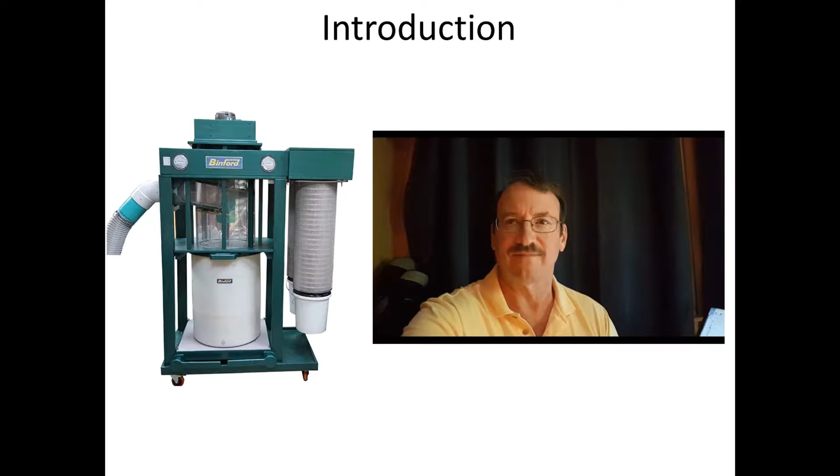Okay, I'm going to talk about the test equipment that I use to measure the performance of the new system. I'm using an Alnor velometer series 6000, bought this used on eBay quite a few years ago. And I'm also using a Dwyer 166 pitot tube to measure the velocity of the air. And I'm using two Dwyer Magnehelics, a 2030 and a 2005, to measure both differential and static pressure in the system.

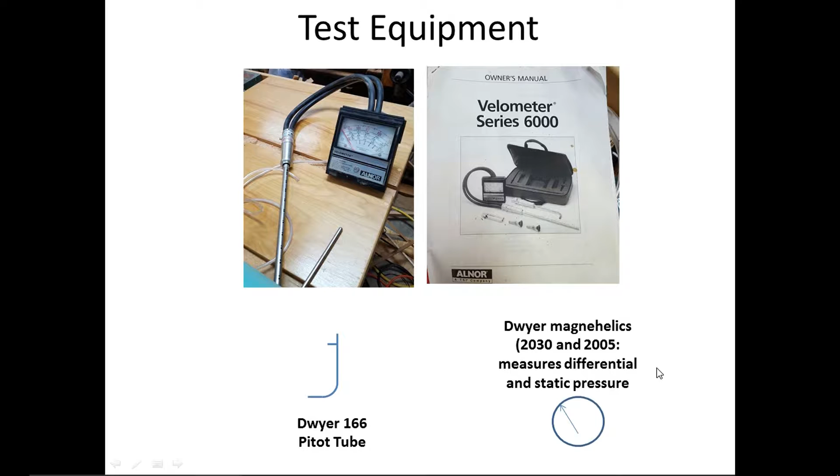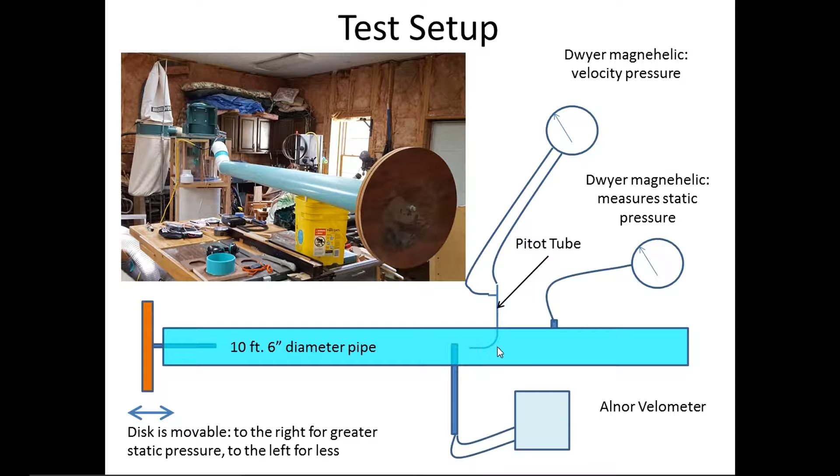Then I could measure the static pressure with a fitting I put on the pipe and measured that with a Magnehelic. And I could then measure the air velocity at various steps along with static pressure. To measure the velocity, I'm using the velometer from Alnor, and I measured it at different places within the 6-inch pipe because the air velocity is not constant across that, and I'm trying to do an average of those different readings. I'm also using the pitot tube, connected to another Dwyer Magnehelic to do the differential or the velocity pressure of that tube itself.

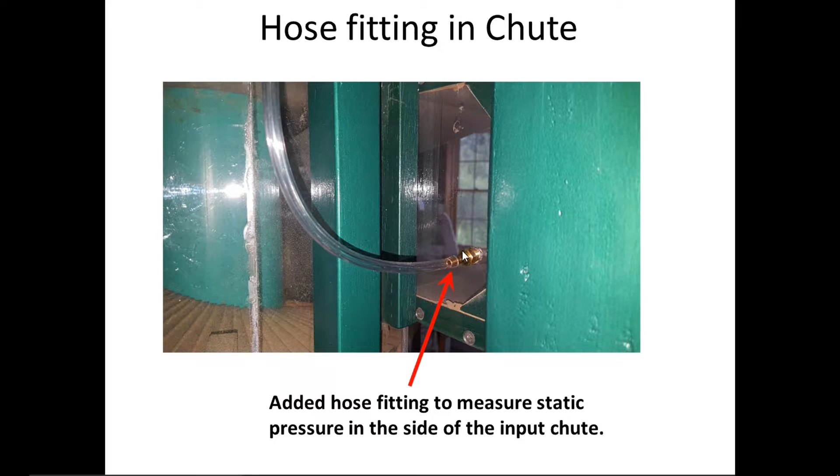And I'm also measuring the static pressure at the side of the input chute. That way I can calibrate the system, and that's always going to be there. And as I operate the system with each machine, I can calibrate the CFM based on the static pressure measured in the side of the chute.

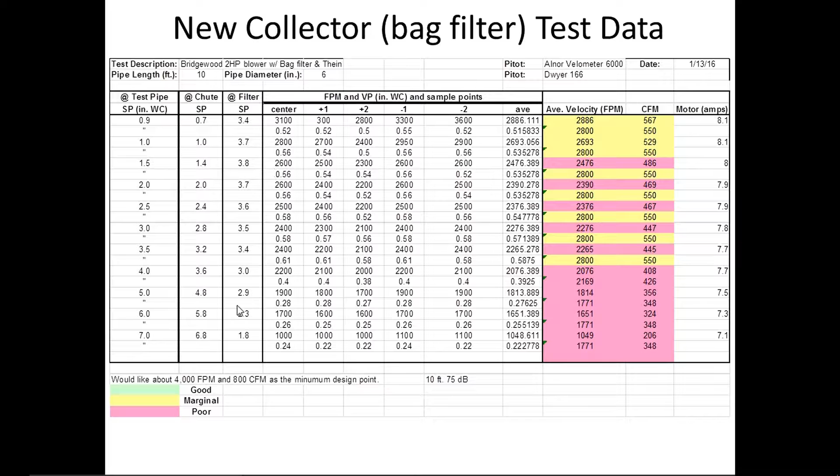The noise level 10 feet away was 75 decibels, very acceptable for a dust collector, significantly less than a shop vac. The other thing you'll notice is, remember I was shooting for 600 to 800 CFM. I did not achieve any of that with the bag filters. There's just too much back resistance to be able to get that airflow.

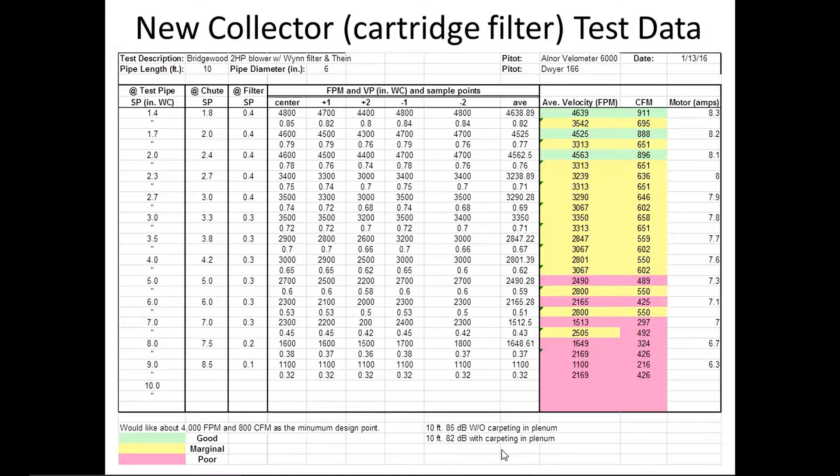The noise level went up a little bit 10 feet away now that I'm moving more air, which you'd expect. Even though it's the same blower, it's moving more air, so it's going to be a little noisier. I also measured without carpeting the inside of the plenum going to the filters, and with carpeting. There's a 3 dB difference, which is quite significant. It was Wynn Environmental who suggested lining the plenum with carpet to reduce that noise a little bit.

In the next video, once I've converted to the 4 horsepower 14-inch fan blower, I'm able to increase that even more. But it also shows you how much back resistance the bag filter has. If I install it with a fixed pipe system, I'm definitely going to need a larger blower to handle the CFM. But just with a 6-inch flex hose, I'm getting pretty darn good numbers. Keep in mind I was probably getting about 150 CFM at best using my old system, so I'm significantly better.

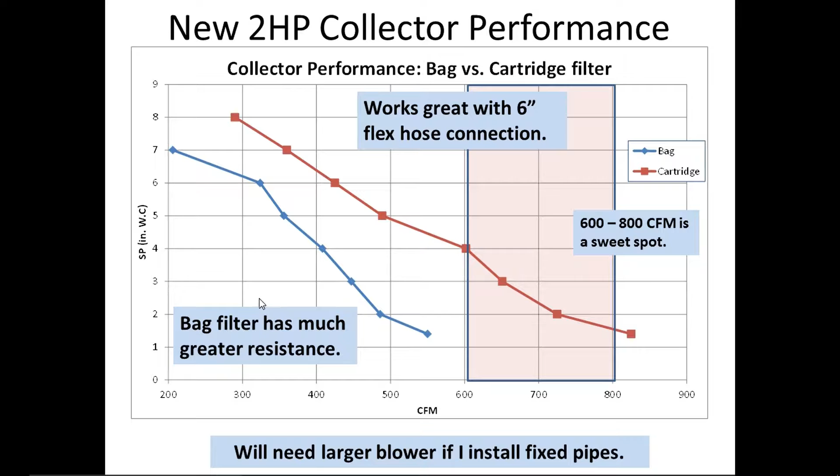The other thing I was really excited about is I measured the efficiency of the system, how well it filters things out. Most of the videos on YouTube about dust collection systems run maybe a shovel full of dust or chips through and then see how little there is in the bag. I don't think that's a real life comparison. So I actually ran 5 bins full of dust and chips through the machine, about 250 pounds of material.

First I did it using the 30 micron bag as a filter, and remember the static back pressure was about 3.6 inches water column. After running that 250 pounds through, I ended up with about 1.8 pounds of fine dust in the lower bag. I didn't have any chips at all. It was all just the fine dust. So even with this coarse filter, the Cyclone itself is 99.2% efficient.

Second, after I installed the 2 Wynn cartridge filters, the back pressure decreased by an order of magnitude, only about 0.4 of an inch water column, and I was left with only 0.2 of a pound of fine dust in the buckets after cleaning the filters. I cleaned the filters using compressed air blowing from the outside in and then looking at the bucket. Granted, I probably didn't get everything out of the filters, but I got most of it out. In that case, the Cyclone's like 99.9% efficient.

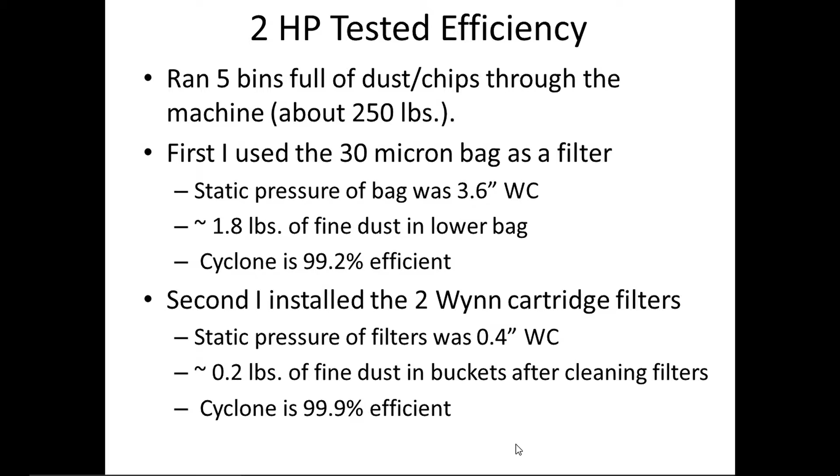I also calibrated the system with the static pressure in the chute itself, comparing the 4-inch versus the 6-inch flex hose with my 10-inch table saw. I got 8 inches of static pressure using the 4-inch flex and 290 CFM through the system. When I switched to the 6-inch flex hose, I got 2.8 inches of static pressure, down quite a bit from 8, and 650 CFM. So that's great, and I'm really excited about that.

The 12-inch jointer uses a 6-inch flex hose but goes to 4-inch flex hoses up to the cutter head in this case, but if I just stuck with a single 4-inch flex, it's giving me about 7 inches of static pressure, 360 CFM. With the 6-inch flex hose, it gives me 600 CFM. The 15-inch planer is 5 inches using the 4-inch flex, or 489 CFM, and 4 inches of static pressure using the 6-inch flex hose and 600 CFM.

The bandsaw itself is 8 inches of back pressure and 290 CFM, and the 6-inch flex is 6 inches of static pressure and 425 CFM. If I connected just a 10-foot 4-inch flex hose to the system, I'm getting about 8 inches of static pressure, 290 CFM, and 25 feet of 6-inch flex hose, I'm only getting 3.5 inches water column, 625 CFM.

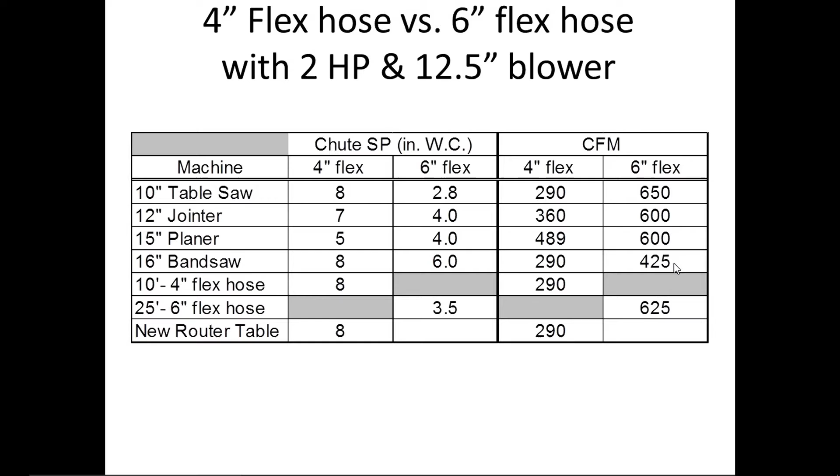And with the new router table, I'm getting 8 inches of back pressure or static pressure with the 4-inch flex and 290 CFM. And I didn't have a 6-inch port at the time, but it came in about the same as the bandsaw here. So acceptable, except for the bandsaw probably, and the router table. I'm really getting some really great CFM, and they're all enormously better than the old system I had.

Connections to the machine. In the past, I've used 4-inch flex hose for each machine and changed the connections at the collector end. That left the 4-inch hoses lying around and tripping over them, and it was a pain in the neck. So given the current airflow, I'm going to use the 6-inch flex hose and connect to each of my machines and only leave one connection to the dust collector. And it's really easy to change. I'll talk about in the next video how I do that, but I'm using roughly like an RV connection that's just a quick connect that I made my own for, and it works very well.

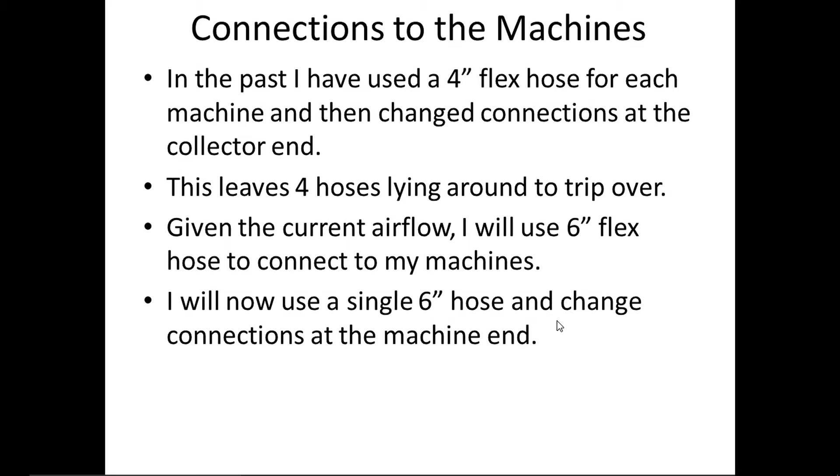Piping comments, again, I have not piped my shop for that, but you really want to keep above 4 inches if possible. You still need to keep in mind that you want 4000 feet per minute to keep the plumbing from clogging up. And you can calculate feet per minute from the cubic feet per minute divided by the pipe area in square feet. Use as little flex hose as possible to keep the resistance down, and use long elbows and minimize those as much as you can.

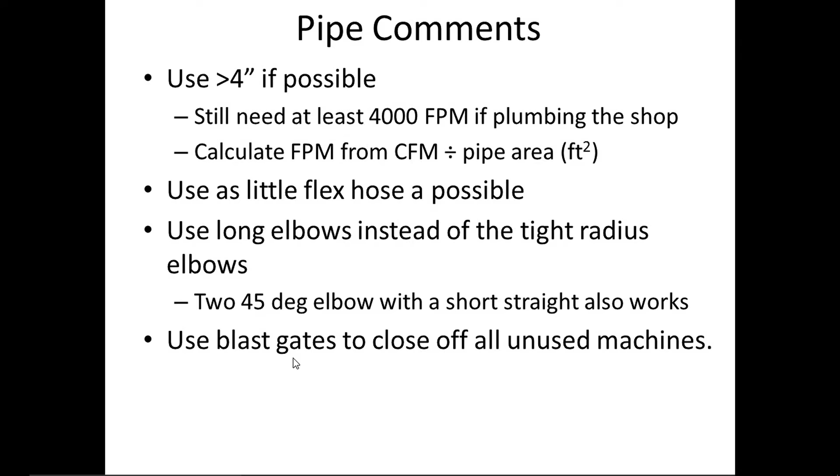You know, the long elbows versus the tight radius elbows. And if you can't find long radius elbows, use two 45s and a short straight that sort of approximates that and works better. And most people that are reviewing this likely are a one-person shop, so you want to make sure the blast gates are closed for unused machines.

And in summary, the new Cyclone collector works great with the 6-inch flex hose. The Cyclone efficiency itself is fantastic at over 99%. Emptying the bin is a snap. No more trying to reinstall the bag or having to worry about bags blowing off your machine, which if you've ever had one of those happen, it really makes a mess. The noise level is very nice and acceptable, and it's a reasonable footprint of floor space, and certainly 30% smaller than my old unit, which took a lot of space.

And it may not be as small as some commercial units, but I dare say that if you use a 55-gallon drum on any of the commercial units, you're getting to be a fairly big footprint. The new collector cost me about $600 in parts, and that includes the 2 filters as well as the $200 for buying the used Bridgewood 2 horsepower collector. It's probably less than half of a new unit of equal power.

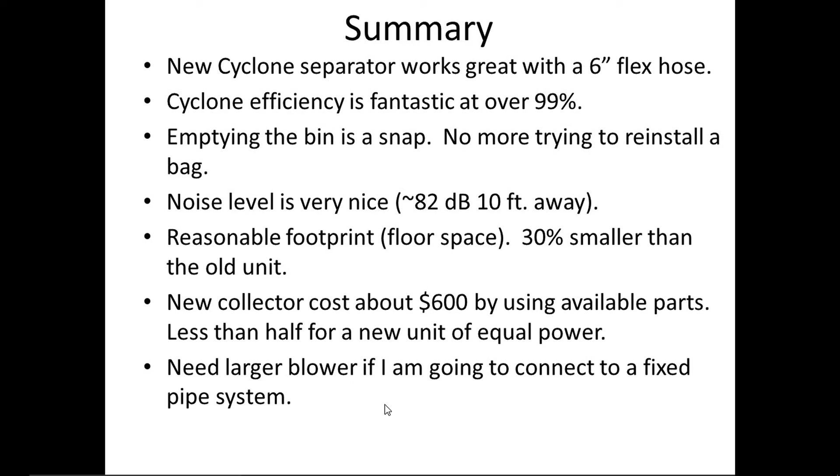The other nice thing is, once I updated in the next video to a larger blower, I actually sold the Bridgewood unit for $225, more than I originally paid for it, and the new blower, fan, and motor cost me, what did they cost me? About $90. So it really worked out well for me. You're going to need a larger blower if you're going to connect to a fixed pipe system. There's no question, and again, I'll discuss that in the next video when I install the larger blower.

With that, that's the end of part 4. I thank you for watching, and look for part 5, where I'll talk about installing the larger blower and a couple odds and ends which I failed to talk about in part 3 when I was finishing the build that I think you'd like to hear about.